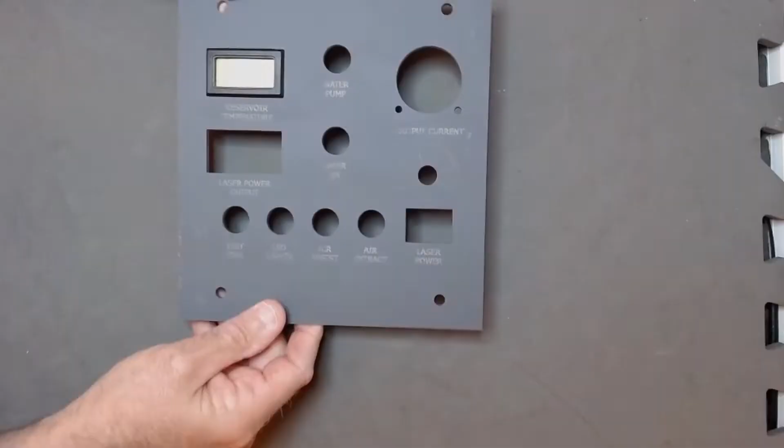This is a panel I cut on my K40 Chinese laser. It's an upgrade panel for the front panel to the laser itself. It's done by a gentleman.

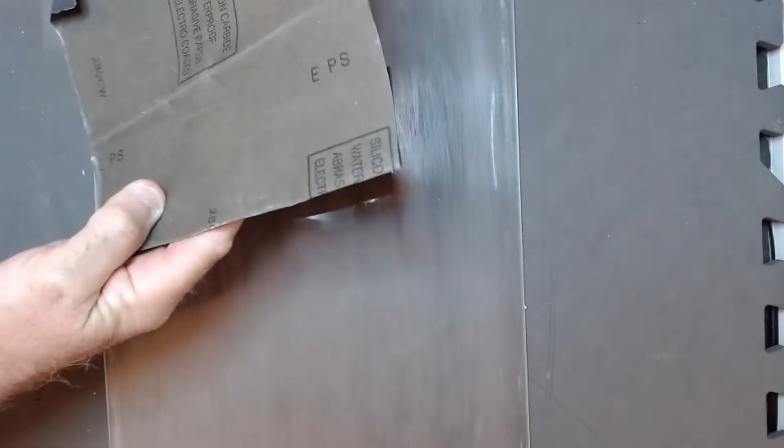So I'm going to give it a light sanding just so that the paint will key to the acrylic. Just give that a light sanding, just take the shine off of it. This will give the paint a surface to adhere to, but when it's engraved, it will still allow the light from the LED backlight to shine through. Just using a fine piece of wet and dry.

Just gives the paint a surface to adhere to. Because unlike this control panel, where I've laser engraved or raster engraved the labels for the switches on the top surface, this one cannot be backlit, because all I've done is burnt away a slight part of the grey surface, so it's made it look white, so no light will shine through that at all.

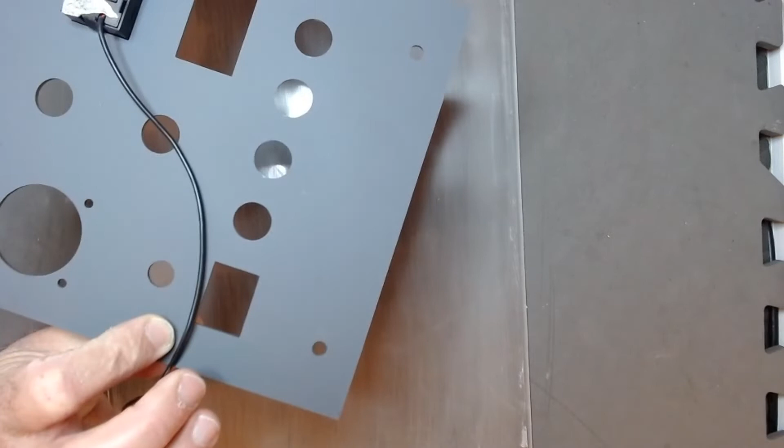So with this one, because we're using clear acrylic as opposed to grey acrylic, if I paint the back and engrave the back, the light should shine through. So I'm just going to give that a dusting over with some black spray paint. Let's find my black spray paint. Here we go. I'm going to use this easy spray paint. Should be good for acrylic. Hopefully I won't get it all over the camera. Give that a good shake up.

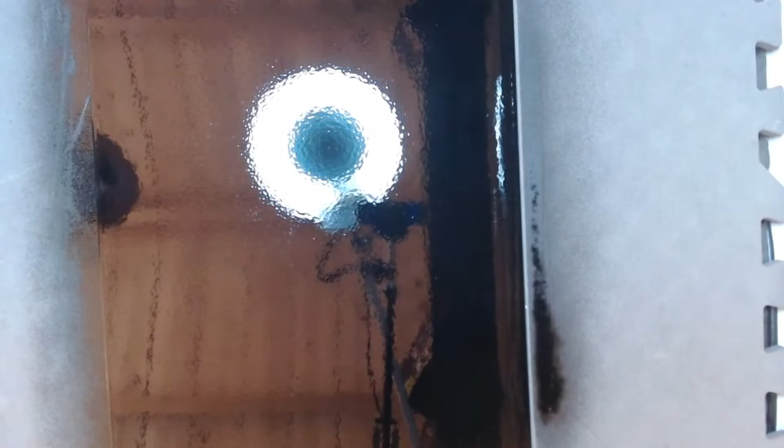Give it a light dusting. Right, you don't want to rush this, so that's one coating on there. What I'm going to do now is leave this to dry and pause the video, then come back once this is dry and check to see if we can see through it or not. Okay, so I'll be back shortly.

Right, as you can see, I've done 2 coats of this black acrylic paint. See that? Black acrylic paint, 2 coats on there. That's the back with the actual paint on. I'll flip it over to the front of the acrylic, and you can't actually see through that at all, which is perfect. That's what we want, because we're going to engrave on the painted side here. We'll then raster engrave on here and also cut out the holes.

So what I'm going to do now is prepare the SVG file for the cutout for the switches and the buttons, toggle switches, and also the engraving file. So I'll come back to you once I've got the SVG file set up, and then we can pop this acrylic in the laser and start cutting.

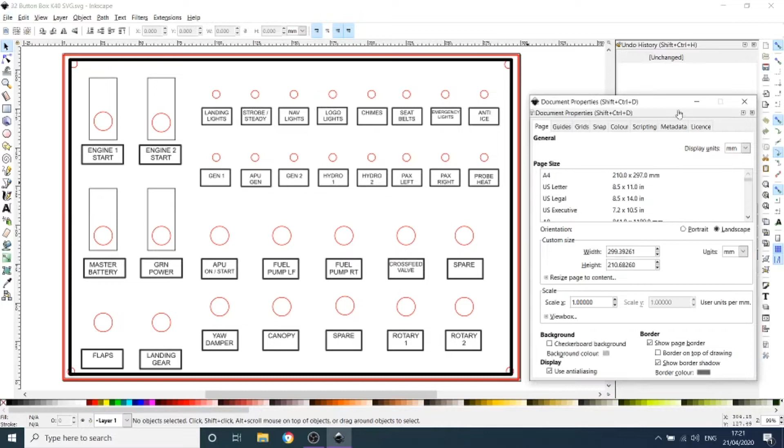This is Inkscape. We open up the file for the 32 button box, which is that one there. As you can see on here, anything in red is a cut, anything in black is an engrave. If there was blue on here, anything in blue would be a vector engrave. Now we've resized this. Whenever you design anything in Inkscape, make sure if you go to document properties that the display units are in millimeters, your units are in millimeters, and you resize your actual file to the size of the document. That way you don't have any large file sizes.

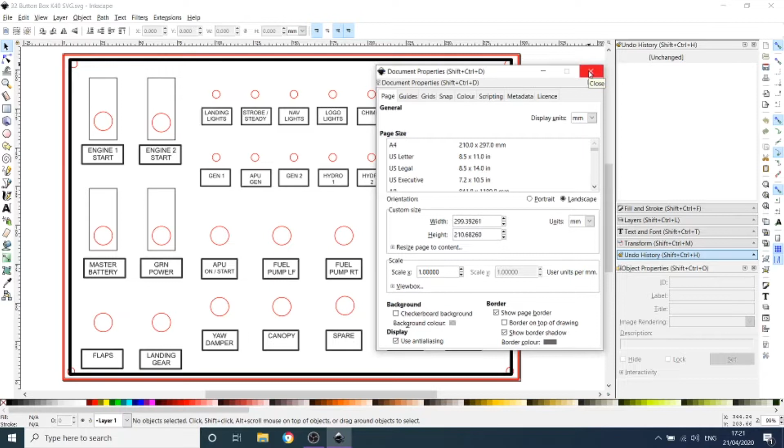Okay, so that's Inkscape dealt with, so then just save this file anywhere on the desktop or wherever, and now you want to import this file into K40 Whisperer. So download the software that runs your K40 Laser; K40 Whisperer is the best one I've found to use at the moment. Again, I'll leave a link in the description below. So if we just open that one up, we've got K40 Whisperer open here. Now this will control your laser.

All the little functions on here are quite self-explanatory. The main ones down here are your raster engrave, your vector engrave and your vector cut. Now these control the speed at which the laser head moves, and the power output you control from the actual laser. But these do make a difference to how it cuts or engraves. I'm going to open that design file that we just had. If we open that up in K40 Whisperer, then it can calculate for us the time it's going to take to vector cut and vector engrave.

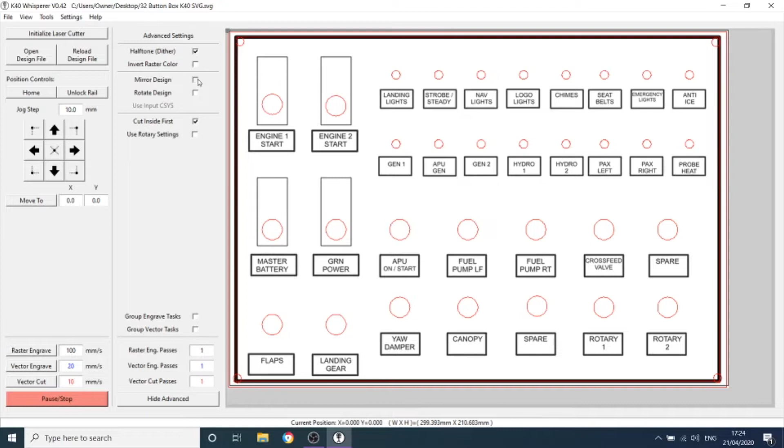There we go, it's flipped it around now. So this will now engrave on the back of the acrylic and allow the light to shine through. Now you can set here the number of passes you're going to do on an engrave or a cut and so on. But what I like to do is I'll do this manually.

I'll go through the first engrave, see what it looks like. If it needs to be deeper, I'll just repeat the process again. And the same with the cut.

As I said before, I believe if this is a 40 watt laser, it should cut through 4mm acrylic in one go, but this doesn't, so I don't believe this is a 40 watt laser, so I have to do 3 cuts. But I like to do each pass one at a time, just to make sure, see what the depth is. If I can get through it in 2 passes, I'll leave it at 2. Right, excuse me. Right, let's plug the laser in.

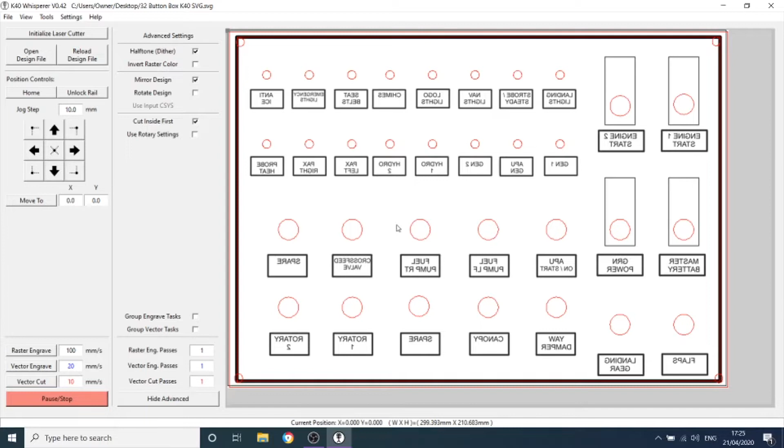I'm going to see if I can go to 2 screens now, so you can see the laser as well. Let's try and do that for you. Here we go. Right, this is the K40. Not a lot to it really. This is the control panel. Got the safety glasses there. This is the control panel.

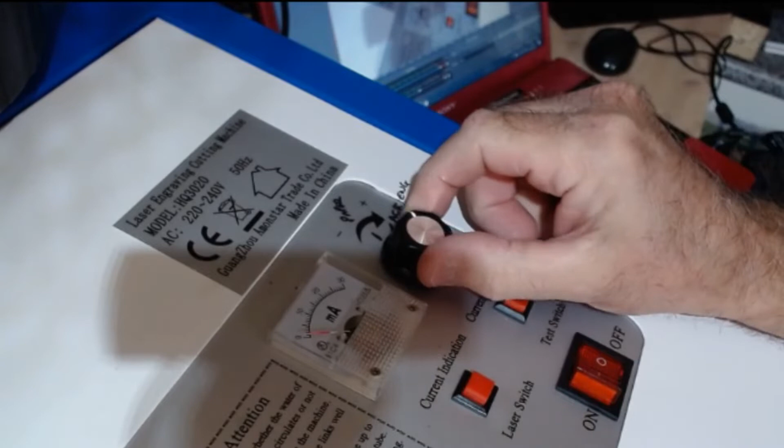This is your power level adjustment. This just moves the amount of amps going through. That's your analog milliamp reader. You've got the test switch, which is just a momentary push button switch which will fire the laser. This switch here turns the laser on, so the laser's ready to fire, and this is your main power switch for turning everything else on.

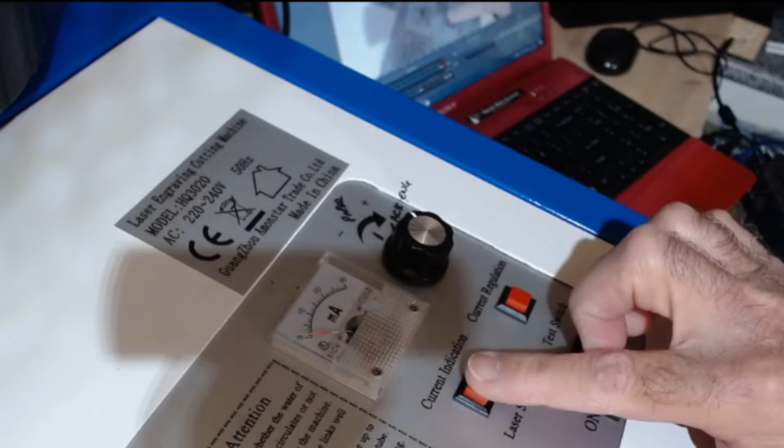What we'll do now is just plug the USB of the K40 into the laptop. There we go. Right, I'm going to power it on. So turn the safety switch on. So you can hear the laser kicking on then. It's all on. Make sure that power is off and this is turned right down. So if there's any accidental firing of the laser, it's not actually going to fire if the power's turned down.

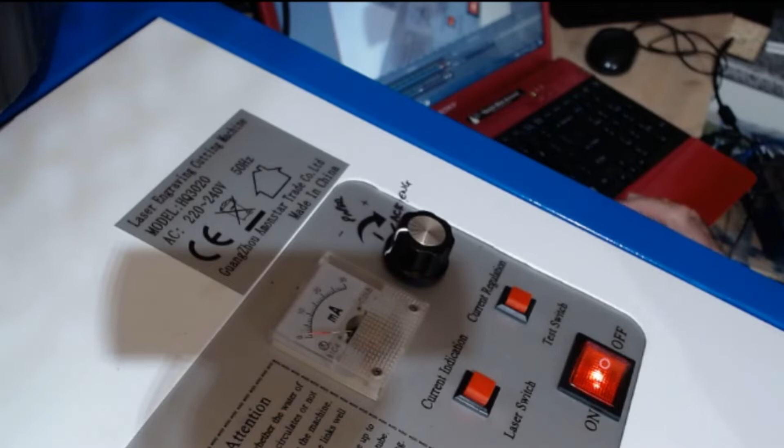Right, so what we do now is if we go back to our display here of the K40 Whisperer. So let's show you K40 Whisperer again. There we go, and we've flipped our design round because we're going to engrave on the back of it. Now down here you can see these are the raster engrave settings, vector engrave and the vector cut.

Now I'll do 3 passes on the cut at 8mm per second. I'm going to change that to 8. Vector cut passes, I'm going to change this to 3. Okay. Now the vector engrave is all raster engrave. We're not doing any vector engraves. The raster engrave is set to 100mm a second. Now depending on what power level you set that, it is how it cuts.

You have to experiment a bit with this because it's not the same for different types of materials or different lasers. Now the last one I did, I stuck to the preset of 100mm per second, and I actually set my power level up to about 10 milliamps. So I'm going to try that for now and see how that goes. Right, so what we'll do is we'll do the raster engrave first, then followed by the vector cut.

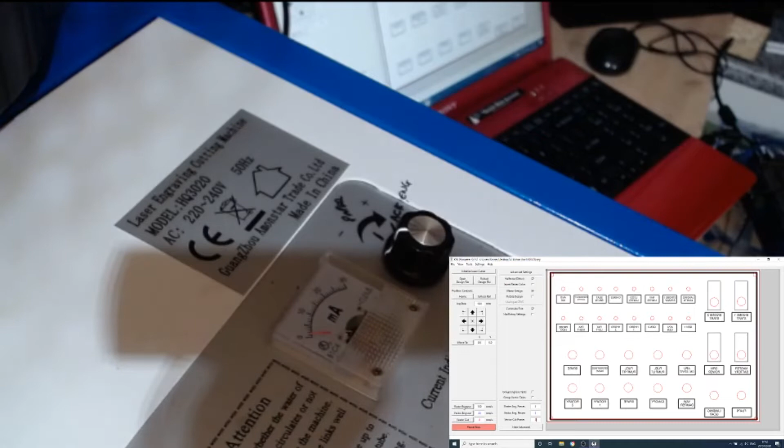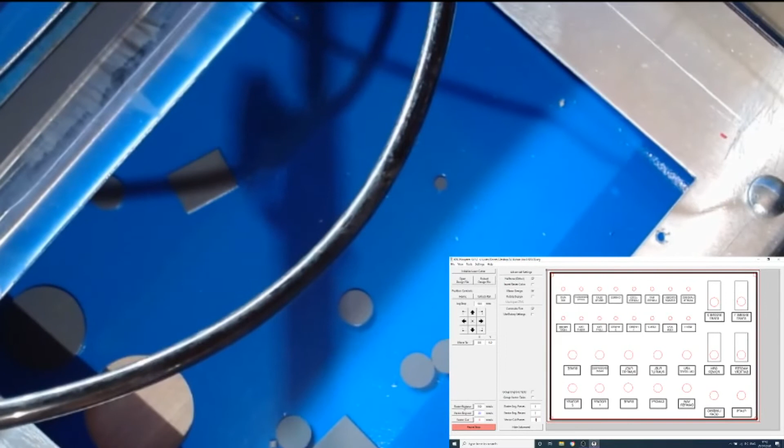Now I'm going to put my materials in the machine before we get this started. So let's put the materials in the machine, and I'll reposition the camera so you can see what's going on there. I'm just going to lift up the lid here. Hopefully you can see in there. I will actually do this with the lid open so you get a good view of it. However, I don't recommend it. You shouldn't be looking at it.

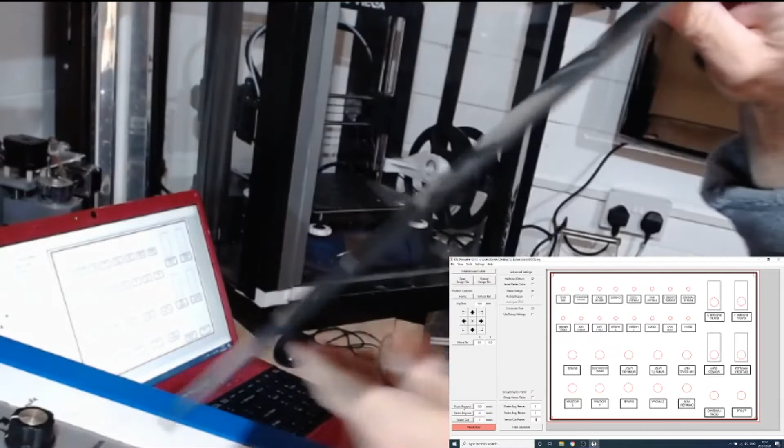This is the 4mm acrylic that we've sprayed with the acrylic paint on the back there. So now it gives you a nice shiny top coat, which you can't chip away at because the engraving is going to be done on the reverse. So if I put this in my engraver now, straight away we come across a problem, which is the fact that my sheet of perspex is actually too big. I'm going to have to cut this down so it fits inside.

Okay, well there you have it. There's the finished product. I'm very pleased with the finish, and this is just a test of the backlighting capabilities of this panel. Engraving's very accurate, very smooth, all the cuts are precise. Very pleased with my K40 Laser, and hopefully I'll be doing a lot more projects in the future.